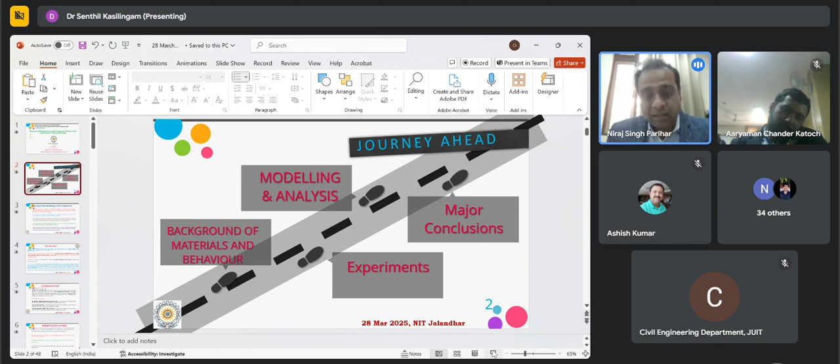And he also has organized some international conferences, national conferences before this, sponsored by TEQIP. He is recipient of the Best Teacher Award at NIT Jalandhar in the year 2018-19. And beside that, he has also got several awards for excellence, including 7 national awards and international awards.

He is also a member of more than 10 civil engineering societies, including fellow member of Indian Concrete Institute and Indian Geotechnical Society. So with this very short description of yours, I come to this platform.

Yeah, I'm sorry to say I'm not a fellow member of Indian Geotechnical Society, but I'm a fellow member of Institution of Engineers, IEI, Indian Institution of Engineers. Yeah, I'm sorry. Okay. No problem, sir. Thank you. Thank you very much for the brief introduction, sir.

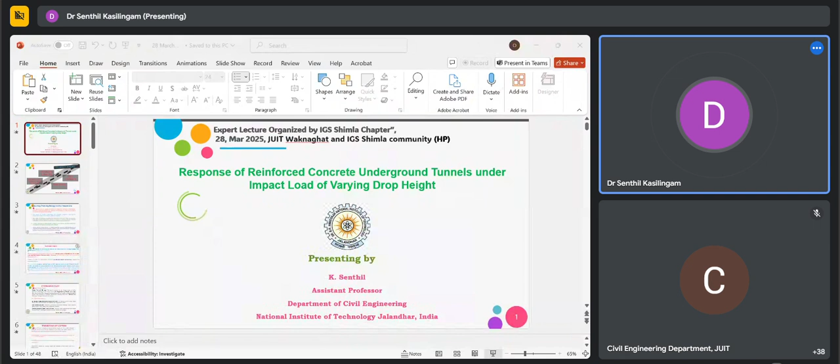So the tunnels, why are they coming? Because of rapid urbanization, city development and horizontal expansion rather than vertical expansion. This is one reason tunnels are coming up. Tunnels play an important role, especially wherever we have blockage. Suppose if you see, especially in Himachal Pradesh or even J&K, these two states.

There are a lot of obstacles topographically, like mountains, rivers, falls, valleys. So this is one of the things. So the tunnel is an important part, and we need tunnels, and the construction of tunnels to provide better connectivity, of course.

Maybe 10-15 years before, even going to Kullu or Lahaul or Manali took several hours. Now, for example, we can reach Kullu from Jalandhar in hardly 5.5 hours. Earlier it took 10 hours plus, and Manali takes another 2 or 3 hours. So we have a lot of advantage because of these tunnels and other facilities.

But at the same time, the problem starts with rock fall, the rolling and falling of rocks, and sudden accidents. Maybe it very rarely takes place, but if it happens, how to protect? What is the damage, and how is this damage to be assessed? That's what is covered in this presentation.

In India, we have almost 4,000 kilometers of tunnels. If I'm right, maybe it's more than 4,000, but approximately 4,000, both railway and road tunnels. A few tunnels have a span of about 9 to 12 kilometers. Those are the longest tunnels in India, especially in HP and Jammu and Kashmir. These two states have the longest tunnels, both railway and highway applications, including Kerala. And in future, longer tunnels are expected to come into the picture.

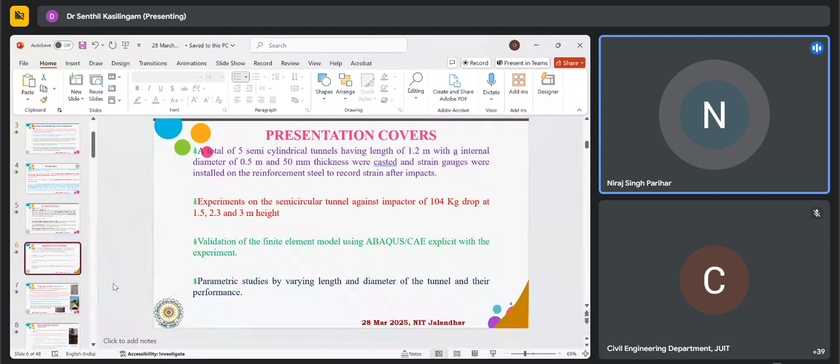Dr. Senthil, sorry to interrupt, but the slides are not changing. Oh, sorry. Which slide? Slide number 6 is not visible. Now it is visible, but it is still not in presentation mode. Oh, okay. Then I will share the entire screen. That will work, the entire screen option. Can you see the screen, sir? Now it's in full screen presentation mode, visible properly. Yes, thank you, sir.

So the tunnels we have considered have a length of 1.2 meter with an internal diameter of 0.5 meter, and the thickness of the lining is 50 millimeter. We have cast RCC tunnels, and of course we have used very sophisticated instrumentation to extract significant information. These experiments were performed by the drop impact test, with an impactor mass of about 100 kilogram, tested under different drop heights of 1.5 meter, 2.3, and 3 meter.

Further, these experiments were validated using finite element software. And we did parametric studies, because such small tunnels are only possible in the laboratory. For an actual tunnel the case may be different; the span and the length are different. So we varied those and studied how the response changes with increasing drop height or increasing span for this 100 kilogram mass.

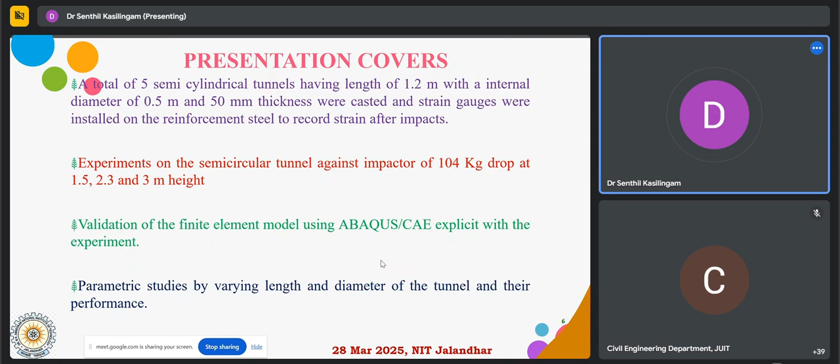Of course, we have not gone into detail varying the mass or the thickness of the lining. That much we have not studied because of the scope of the project, but we were satisfied considering two parameters, the length and the diameter of the tunnel.

For the reinforcement of these tunnels, we used 6 millimeter bars placed at 60 millimeter spacing, with a yield stress of 420 MPa. Strain gauges were used on the reinforcement to measure the strains. This is one of the important parts, because whatever experiments you perform, retrieval of the data is very, very important.

Where you place your strain gauges, what kind of instrumentation you use, how the data is retrieved, which data logger is used, is very, very important. So sophisticated equipment is essential, because we have to retrieve the strain data. We need very sophisticated data loggers, with a frequency of at least 10,000 hertz or sometimes more; the data logger's sampling rate especially should be very high.

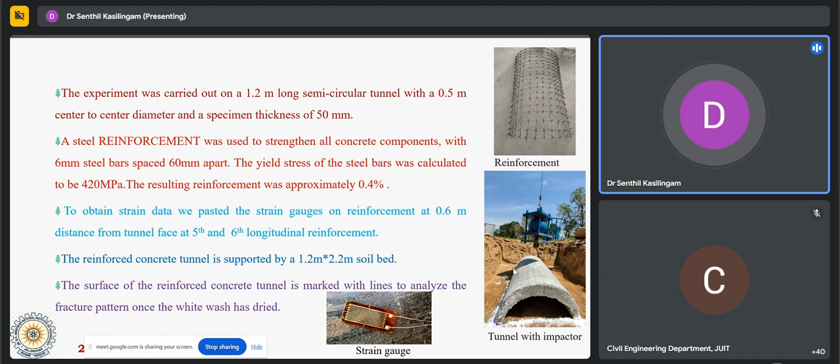So the tunnel was supported with the soil base. That's what you can see in the right side figure. The tunnels were made, and just a simple assembly we have shown in this slide. And also these tunnels were cured. Whatever material we have considered, briefly I have given the materials; we have proposed M25 grade concrete.

M25 grade concrete. Sir, the slide is visible, right? Now it is not a problem. Yes, yes, it is right.

Okay now. So M25 grade concrete we have considered because it's simple to cast, and mainly it should be workable, because we have cast it in the standing position due to the complexity in the shapes. We have to pour the concrete at a height of 1.2 meter, so there is a possibility of segregation and other issues.

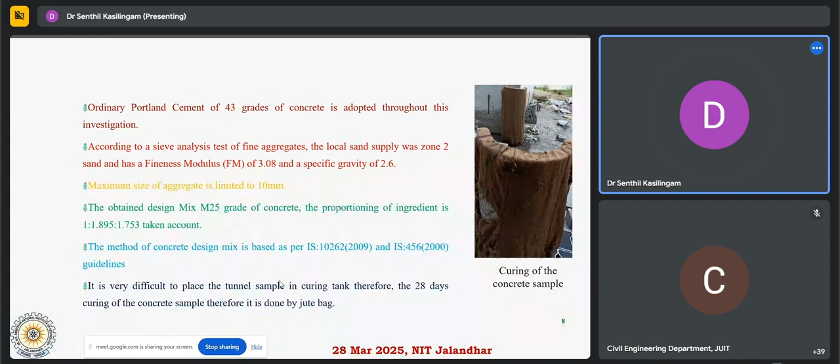So that's why we have taken simple M25 grade concrete, to avoid the complexity in the vibrations or requirement of vibrations, honeycombing, etc. And further, we have cured it as it is, and the mix design and other things we have taken care of as per IS code. And this particular testing frame we have fabricated in front of the Civil Engineering Department, NIT Jalandhar. This is a very simple test setup.

And this particular mass also we have defined by different trial and error. Initially, we made only steel balls, about 1 feet diameter, because it's the effect of a rock falling that we want to develop. So we made the steel balls and tested, but with the varying height and other things, many issues came up.

But due to the sensitivity of the equipment, there is a high chance the load cell and the wire may get damaged during the free fall. So that's why we have not placed the load cell. The impact force was recorded using simple energy principles; nothing else we have used. So the hemispherical nose of 40 millimeter radius we have used, and the height is about 40 millimeter.

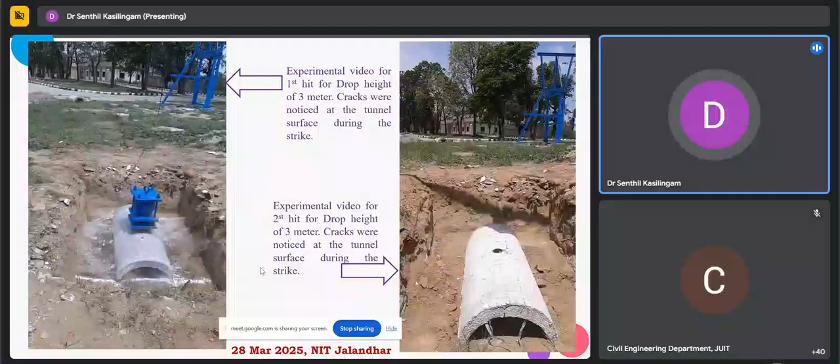And now let's move to some of the videos. Okay. Now this is the simple tunnel, tested without any soil. So you can see after a hit, the impactor is falling. If there were a load cell, there are chances that it may go in any direction, we don't know, so it may get damaged. So that's why the load cell and its connectivity may get damaged, so we have not used a load cell.

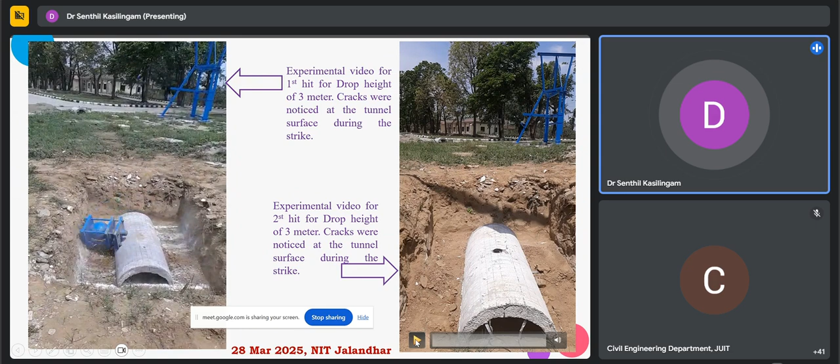And this is the first hit, just at the beginning of the test. And then we went to the second hit, that is multiple hits. The second hit also we tried with a 3 meter drop. So how does it take place? If we drop the steel ball alone, there is a chance that only local impact will develop. But when we use the steel plates, they try to cause a global impact.

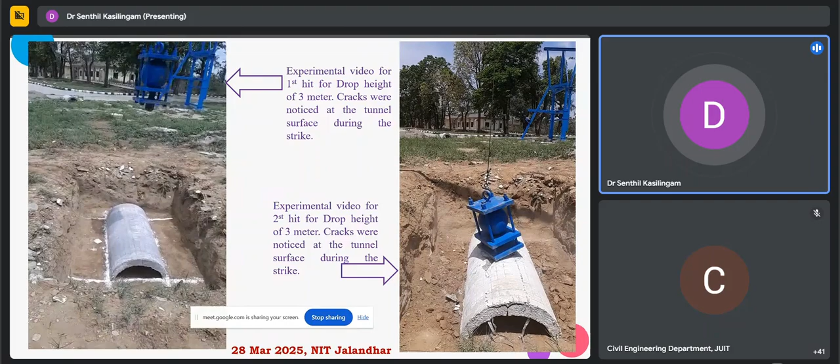Because when rolling of rocks takes place, rocks hit the structure repeatedly, and they may not be the same shapes or similar in nature. It may be some big rocks or maybe some small stones; there is a possibility of a mixed mode. So that's why we have used this type of arrangement, which we arranged and changed by trials. Now let's go to the tunnels with soil.

We have considered only around 150 millimeter filling, because the nose height is only 40 to 50 millimeter, near about 100 millimeter, not more than that. So if we fill more, the soil itself takes the entire load, and it will not reach the tunnel. That's why we have used a very nominal soil filling of about 150 millimeter. Then we have tested, and if you see here, this is the first hit.

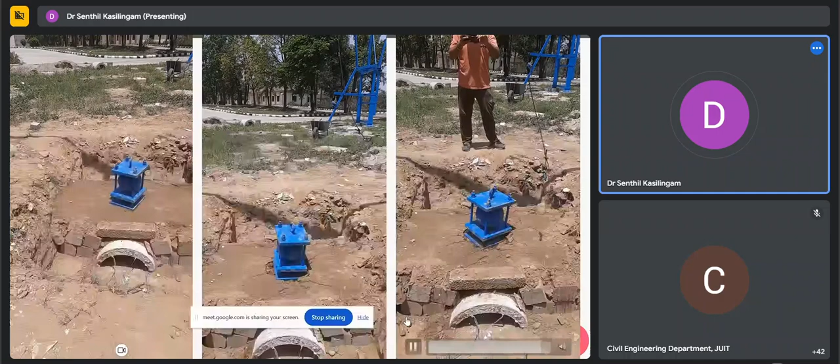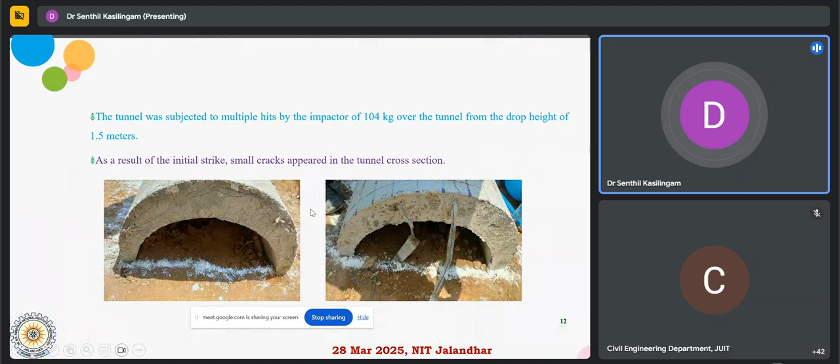And this is the multiple hit. It's like a second hit, a third hit. So you can see how this concrete tunnel deforms, and the response at the base, how it takes. So all this we can see. Okay, and further the responses were recorded in the form of the residual displacement and residual spalling. So all this we have recorded.

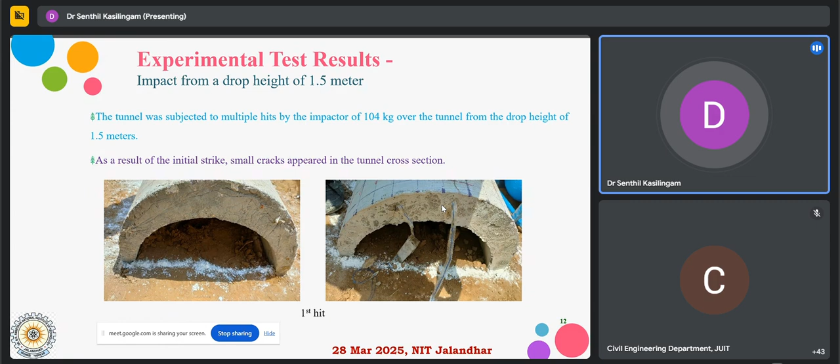And this is the first hit. We can see this is before impact and after impact, and you can see there are very small cracks. But when you go to the second hit, you can see significantly wide cracks at the crown. Okay, and also there is compression damage. You can see at the top surface there is compression damage, and of course the tensile damage at the

bottom of the tunnels. And the strains we have recorded. I think 2 to 4 strain gauges we have used, but a couple of strain gauges were not giving any readings. So whenever we go for testing, try to always go for more strain gauges or accelerometers, whatever we are placing, so that you will get a good number of results and we can use it for the validation. And now let's go to the third hit and fourth hit.

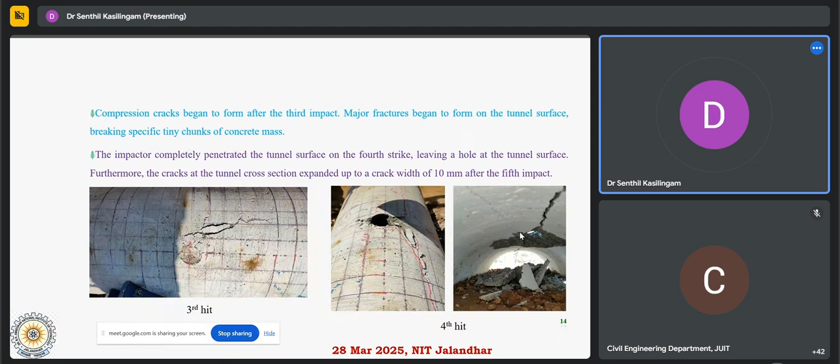The third hit, you can see there is significant damage at the top. That is compression damage. And at the fourth hit, you can see very clearly, this is inside the tunnel. You can see there's significant spalling of the concrete. And also there is a longitudinal crack in the tunnel. Okay. And further, this is the test at 1.5 meter height. Okay. Now let's increase the height.

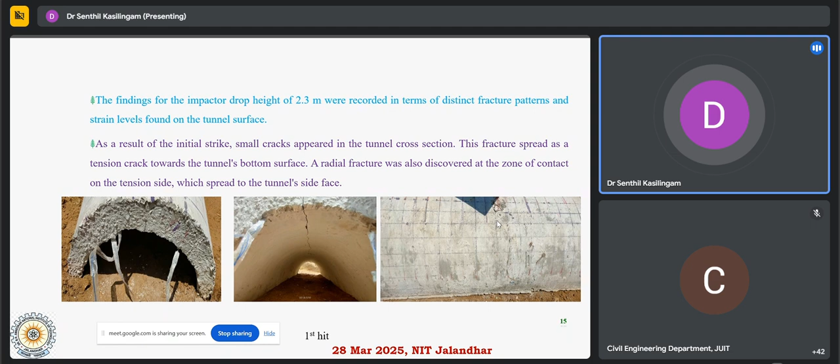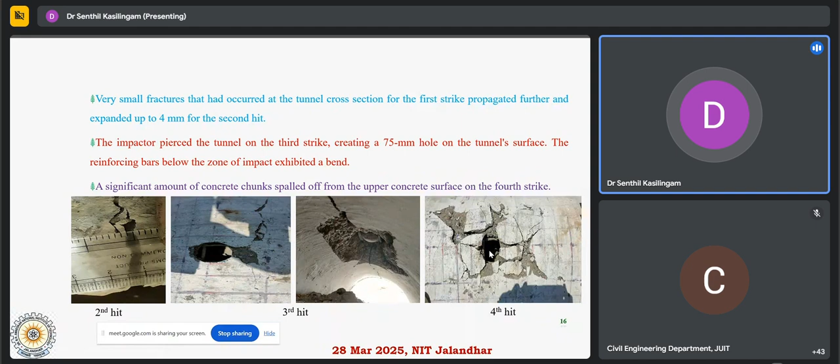Suppose 2.3 meter height. So what is happening at the first hit itself? You can see the longitudinal crack. It's a very precise crack that developed, and of course very insignificant compression damage. So there is only tension damage. And then the second, third, fourth hit, you can see significant damage, and especially at the fourth hit at 2.3 meter, there is significant loss, or you can say spalling and damage at the top surface of the concrete.

And further, this is the result at a 3 meter drop height. So at 3 meter, what is happening? In the first hit itself, there is a significant crack. Even diagonally there is a crack. Also longitudinally there is a crack. You can see inside the top right corner picture, that is inside the tunnel. The cracks were longitudinal, and also there are diagonal cracks.

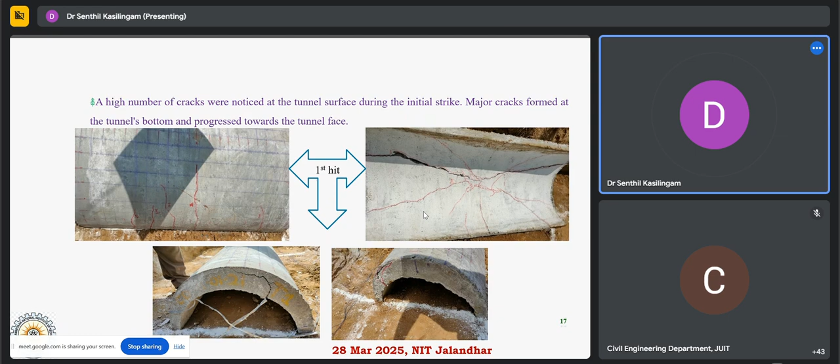And now, if you go to the second and the third hit, just see this picture, what is happening in the first hit and the second hit. In the first hit there are only cracks. In the second hit there is significant damage or spalling. The volume of the concrete is significantly gone, or it just exploded.

And further we went to numerical simulation. So this is the behavior we want to capture. The impact force, the strain, and the residual displacement we have. These three data were used for the validation. And the geometry of the concrete tunnel as well as the soil and the reinforcement were modeled and considered as a deformable body, whereas the impactor was modeled as a rigid body.

The concrete we have considered as M25, as already told you. Steel reinforcement of about 420 MPa strength was considered. And dynamic explicit analysis we have considered, and the time step is 0.05 seconds. And the frequency, the time step delta t, is 1/100.

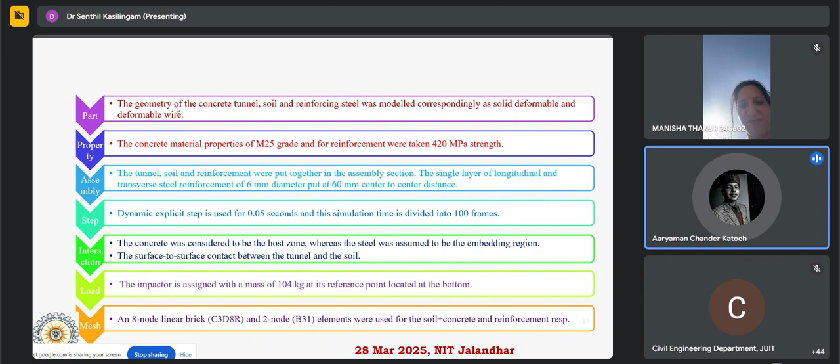Sir, if we change the section from circular to oval, then what would be the difference? Sorry. So the tunnel sections, are they circular or oval? Actually, there is disturbance. Can you please repeat? Sir, the tunnel sections which we are testing are oval sections or circular sections? Amandeep sir, or somebody else, can you help me? He's asking whether the tunnels being tested are oval sections or circular sections. No, it is circular. It is circular, sir.

Aaryaman, we can take the queries towards the end of the lecture in the discussion session. I think we can first finish the lecture. It's not a problem, sir. Anyone can interrupt. It is not a problem, Atash. Okay, sir. Okay.

So the time step we have considered is 0.05 seconds, and the frequency, or you can say the delta t, is 1/100 seconds.

Sir, can you hear me? Yes, now you're audible. My presentation is visible? No, sir. Yes, it's come now. Sir, can you hear me? Yes, now it's visible, sir. Yes, I can hear you, sir. Your presentation is also visible. Okay. Can you hear me, sir? Yes, sir, we can hear you. Done, thank you, sir.

So the concrete was considered as a host zone, whereas the steel was, you know... right, sir.

Sir, I think the voice is reaching late. Yes, I think there is some lag. I think you can continue without interruption, that will be okay to us.

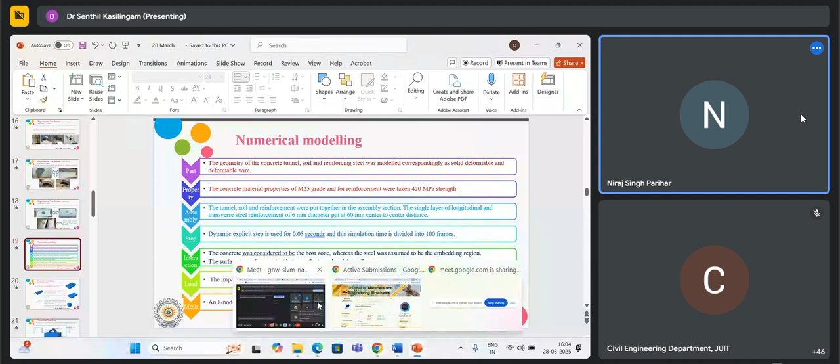Sir, now can you hear me? It's very proper, yes, sir. Yes, sir. Done, thank you.

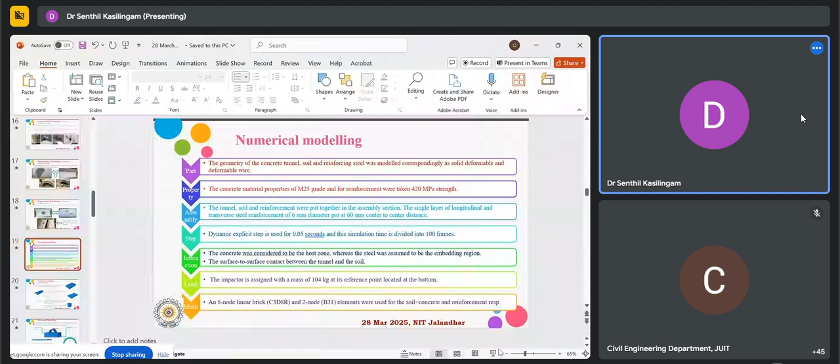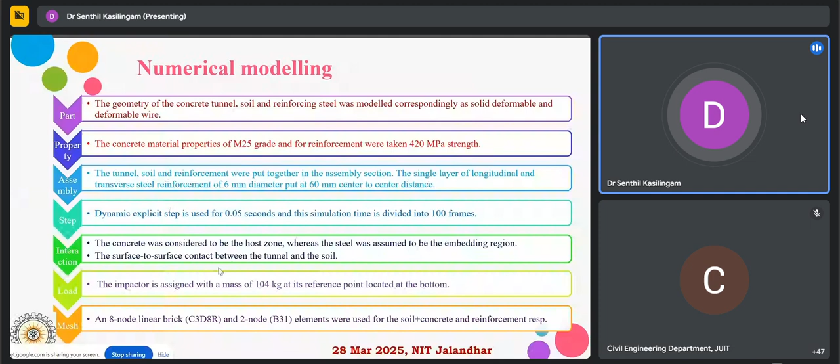And also the surface to surface contact between the tunnel and 8 node linear brick elements for the concrete were considered, with a lot of trial and errors. Also some assumptions we have made in the computational depth that we have done, like the dimension of the soil samples were taken as 1.83 meter by 1.2 meter, and the thickness was considered 0.3 meter.

But actually to understand the depth of the soil, at what depth this soil pressure goes, for that you have to use some theoretical equations. There are equations, and based on those equations you have to derive this pressure distribution, so accordingly you have to choose the soil dimensions. This is one thing. But here, maybe we have not followed that because of some of the constraints, so that is one thing I want to highlight here.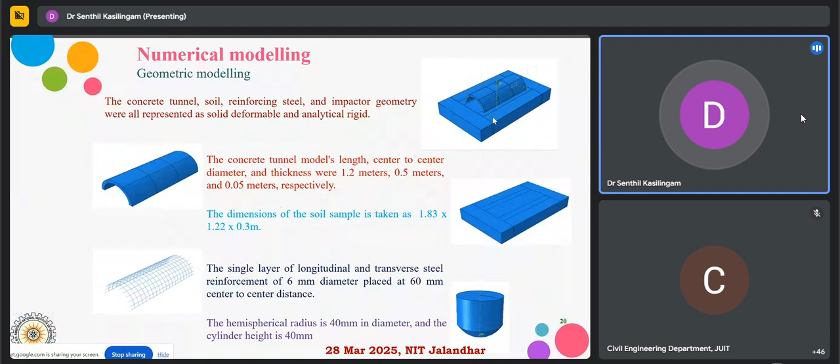Sir, can you hear me? Yes, sir, we can hear you. Oh, this particular slide, you have not listened to? No, sir, not this one. This slide? No, sir, okay, this slide, yes, you were discussing this one. Okay, I think I don't know the network, it dropped out. Sorry, okay.

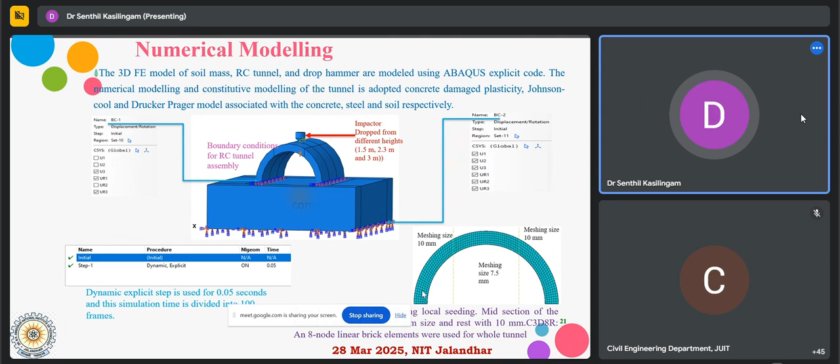So the choice of the constitutive model is very important. Suppose, for example, the soil, we have different models. Even if you go to the Abaqus library or ANSYS library, you have different models, so which model do you have to choose? For example, we have studied the response of clay brick walls. The bricks we have modeled using the Drucker-Prager model, also we have modeled bricks using the Mohr-Coulomb model. In the same study, to some extent the Mohr-Coulomb model was giving better results than the Drucker-Prager model, but in this case, tunnel problems, we felt the Drucker-Prager model is giving better results.

So that's why the choice is very important, whether you have to choose a phenomenological model or a physical based model. As a civil engineer, we can limit with either one, it's not a problem. And now a few constitutive models, just for your information: for a phenomenological model, we can say Johnson-Cook model or KHL model or Arrhenius type model, and also for physical based models, the Zerilli-Armstrong model is one of the very renowned models.

If you go very specific for metals, soil, concrete, ceramic, we have very specific models, because it depends sometimes on whether the material is ductile or brittle, or something else. So that's all we have to decide, and we can choose it accordingly.

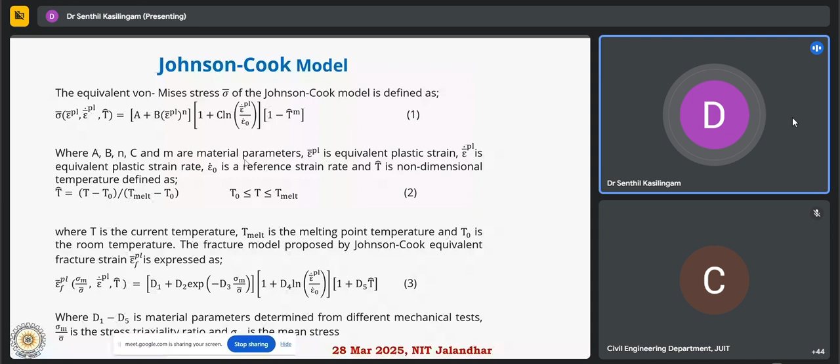For Johnson-Cook model, especially for steel reinforcement, for metals and ductile material, we can use it. These parameters, during my PhD, I have characterized and used. If you Google it, you'll get an idea, it's more widely used and generally available on Google, you can go through these models. For four different metals, I have characterized during my PhD, so I don't want to waste time presenting here. If you have any queries in this regard, please contact me, not a problem.

This is the parameters we have used for the steel reinforcement, considering strain rate, stress state, and temperature effect under strength as well as failure state. Mainly the strength is nothing but the model, it carries the load. When it reaches the maximum or ultimate load, your strength model stops. There is no effect, then it is called failure model. After reaching the ultimate point, whatever behavior we consider as failure, because your strength, displacement, resistance, or forces start decreasing, that is called the failure model. So A, B, C, N, M are strength constants, and D1, D2, D3, D4, D5 are failure constants.

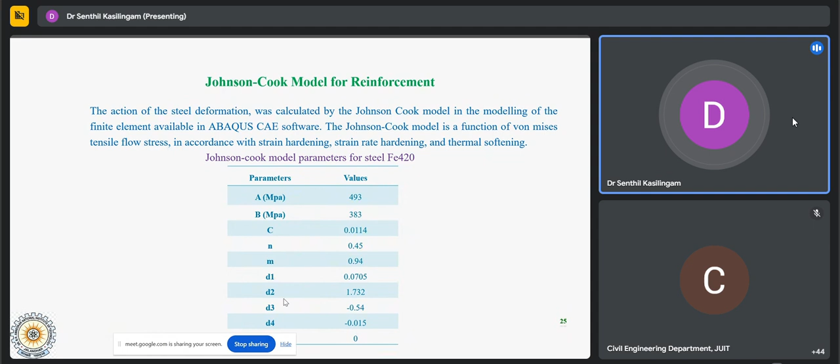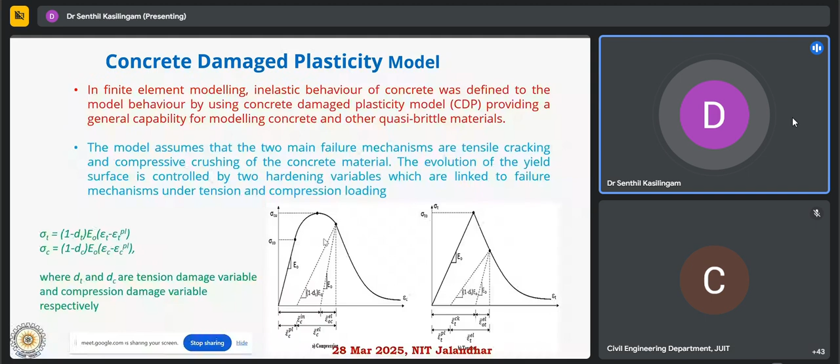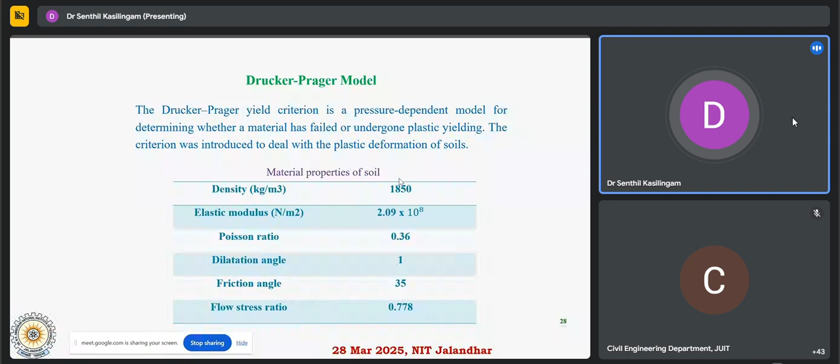For concrete, this concrete damaged plasticity is one of the renowned models you can use. It's simply compressive behavior and tensile behavior. For soil, we can use Drucker-Prager. As I already told you, you can use even simpler models, there are standard material constants. Either you can calibrate those constants through characterization, or take them from the literature. It's best if you characterize those material parameters, it's always good because that will try to give you realistic results.

The mesh convergence, as I already told you, we carried out mesh sensitivity analysis by varying the mesh size: 20, 15, 12, 10, and 7.5 mm. What displacement we got from the experiment is about 32 millimeters, which is called the residual displacement. Also the corresponding impact force, about 95 kilonewtons, that we achieved when the element size in the concrete is about 10 to 7.5 millimeter mesh size, so that mesh size we considered for further analysis.

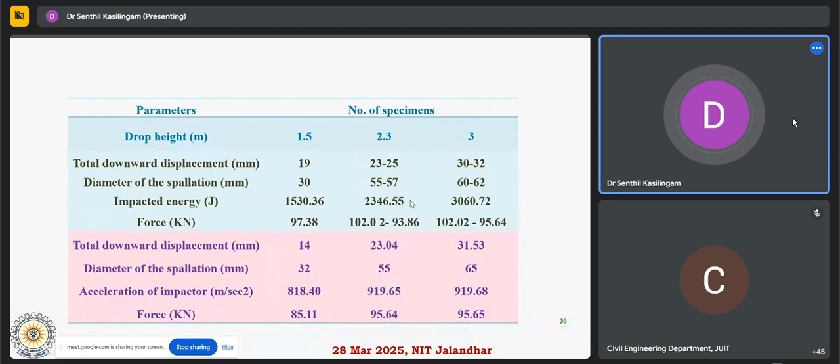We also recorded the strains. Experimentally we got micro strains of about 150 to 175. The numerical strain also reached about 185 to 190 micro strains, with a maximum deviation of about 10%. However, in the experiments it immediately comes down, maybe due to the strain gauge response. That's why sometimes, especially recently, I came to know issues using some equipment I purchased from Applied Measurements.

But HBK suggests different equipment. You have to use very sensitive machines especially for strain measurement. So I can recommend, because my equipment is not capturing the strains properly, that I purchased from Applied Measurements UK. But if you are buying HBK, since HBK is also one of the renowned manufacturers of data loggers and devices, that may be better, from conversations I've had, because I wasn't happy with the strains I got. But anyway, this is just for your information.

These are the different failure patterns under 1.5 meter, 2.3 meter, and 3-meter drop heights, which we have compared, along with the residual displacement. Now, the compression damage, damage C, describes compression damage, damage T describes tension damage, C and T being compression and tension. So what is happening on the front side, for 1.5 meter, 2.3 meter, and 3 meter.

So front side and rear side, we can see from this image. And similarly, maybe if you recollect the experimental results, we can get an idea how the cracks develop. Also some of the videos I can show you.

During impact, we don't actually know what is happening. If you watch the slow motion videos we have recorded, we can try to get some inputs. But if you carry out the finite element analysis, definitely you will get more insights. That's one of the main advantages of doing such a comprehensive numerical analysis.

And this is the displacement. How the displacement happens, it's almost 46 millimeter displacement. That's what is happening.

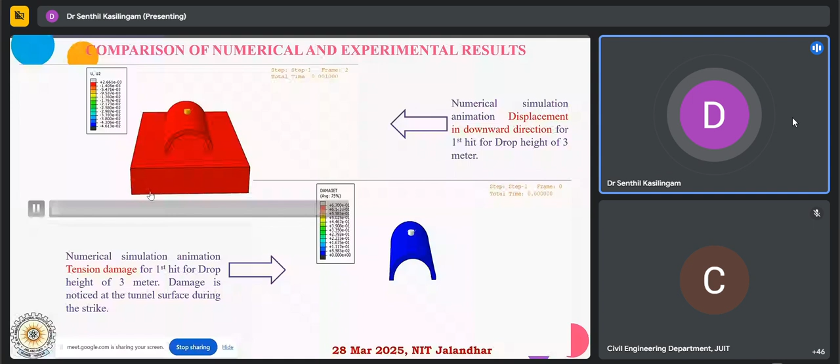And here, if you see the damage, how it takes place, how the damage is propagating. Can you see the video, sir? No, sir, not still. This tension damage video is not visible. It is too much lagging. Even the displacement video is not visible. I was playing the displacement video. That means my screen and my voice, there is a lag. Sir, earlier that was visible, not as of now.

Okay, now I'm repeating again this tension damage video. Can you see this now? Yes. Okay.

So you can see there is a significant crack that develops when the 3-meter drop height takes place. We can see very precisely those cracks, and also a little bit of spalling at the edges. This is just for your idea, so that you can further use the techniques and get more insights.

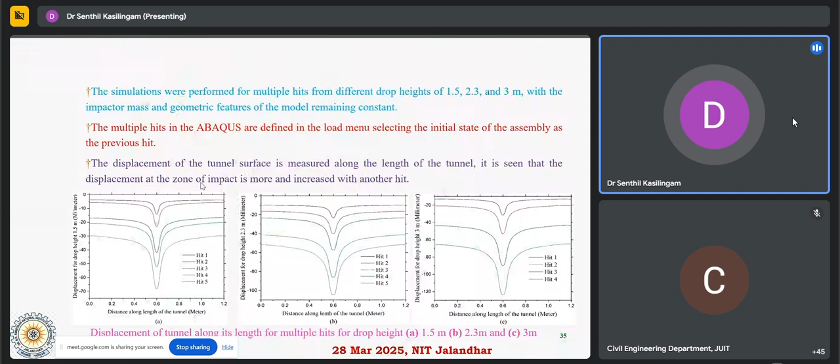What is happening in the displacement, I can tell you. When you have 1.5-meter drop height, on hit 1, hit 2, hit 3, hit 4, hit 5, up to the fifth hit we have seen the displacement increasing, and at fifth hit we have reached 70 millimeter. But when the drop height goes to 2.3-meter, we are going up to around 100 millimeter displacement. When the drop height increases to 3-meter, it went up to the fourth hit, and the simulation shows about 120 millimeter displacement, quite high.

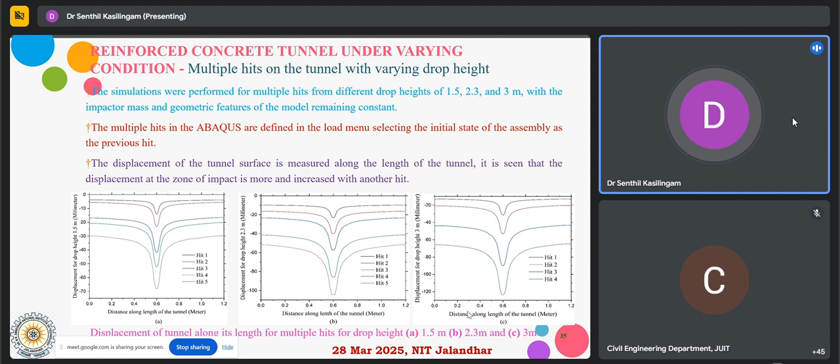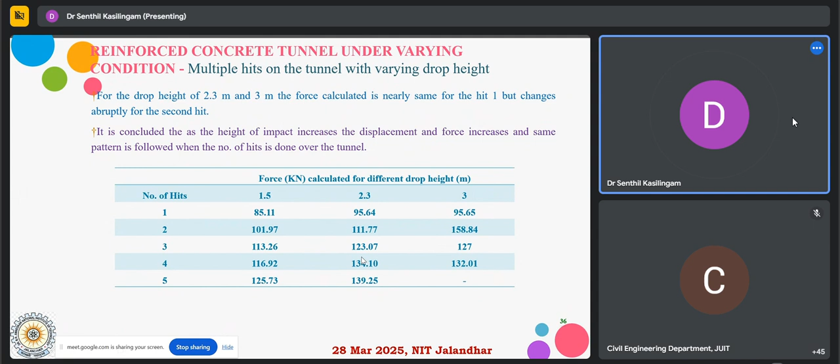So 132 kilonewton is the maximum. That's what we have achieved from the numerical simulation.

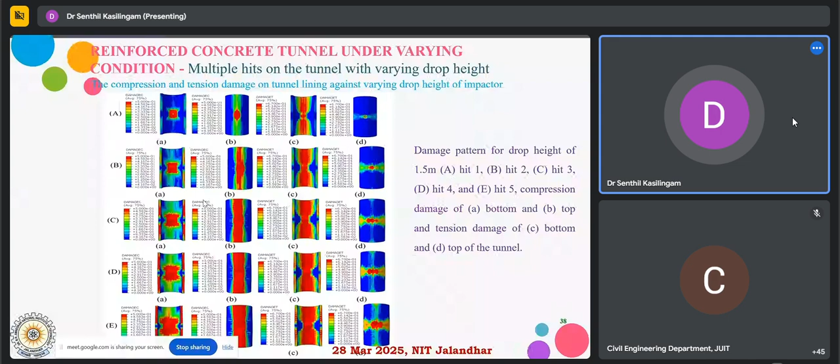Further, the tension damages that we have compared on different cases, for hit 1, hit 2, hit 3, and hit 4, and all different cases. Further, I'd like to go to the different parametric studies, because the multi-hit impact, that is fine, I don't want to discuss further.

So that means there is a local effect, a local failure due to this impact, there is no global failure. So maybe due to this rockfall impact, even with multiple hits happening, it may not affect your tunnel. That's what the simulation is stating. These results you can further validate by performing more simulations and doing some case studies. Okay, this is some insights for you people.

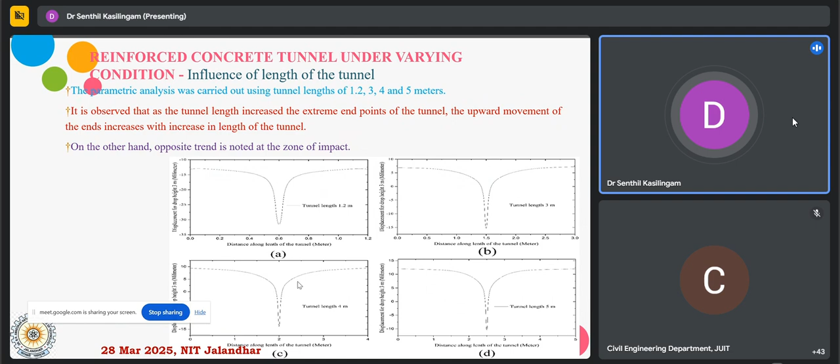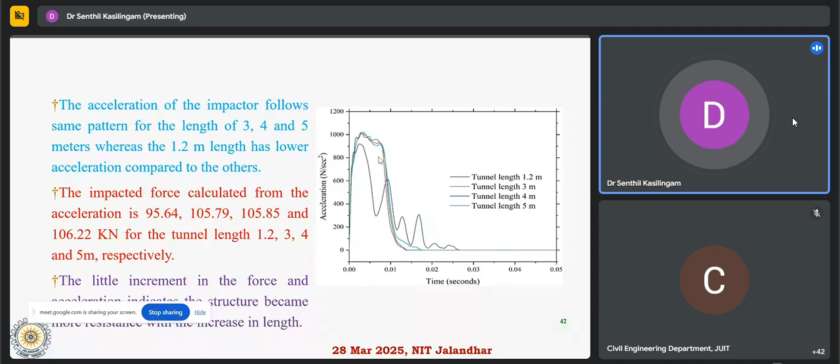And the acceleration which I have recorded, yes, it is a constant. After 1.2 meter, the acceleration is a constant. It is not changing, irrespective of the length of the tunnel, either 3 meter or 5 meter. The acceleration is about 100 g. Okay. Now let's talk about the damages.

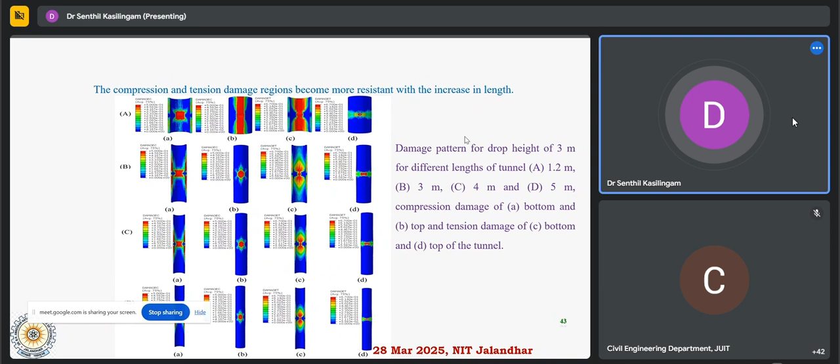By varying the length, you can see that the damage is only local damage. Even if you increase the length, it won't affect, because at maximum 1.2 meter length, or maybe the shorter span length tunnels, it may be sensitive. That's what I want to say based on the findings from this simulation.

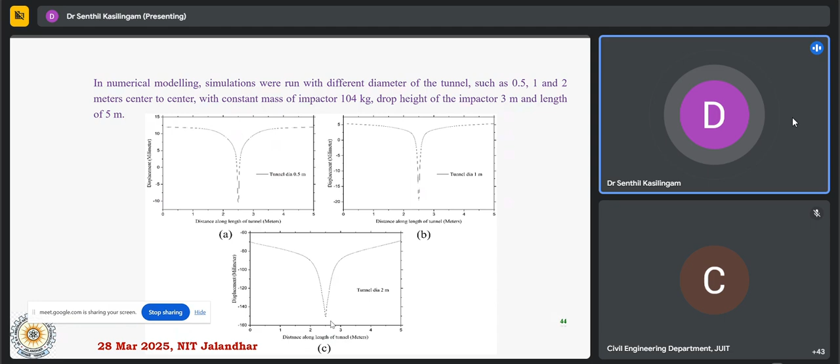Next, we have varied the diameter of the tunnels. So by varying the diameter, there is an increase in displacement that we have noticed. So 0.5 to 2 meter when we are varying, 0.5 is our actual experiment, 2 meter is a numerical simulation. So displacement is increasing significantly, near about 140 millimeter.

Of course, here your acceleration actually changes, and the damage also, when the diameter increases, of course, there is a damage change. Otherwise, it's local damage, but a little bit of compression damage is there. Otherwise, it's a local damage.

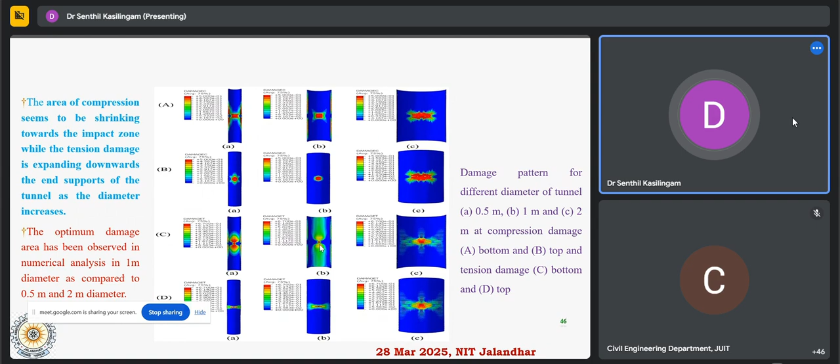So let's conclude this presentation. In case of length variation, the impact force remains near to constant. You vary the length, it won't affect your response. And the optimum damage area observed in the simulation is at 1 meter diameter.

Sir, can you hear me? Yes, sir. Now we can hear you. There was some disturbance in between, sir, in the conclusion slide. Acha, there were disturbances. Can you hear me now? Yes, yes. Your voice got disconnected for a while. Okay. Actually, maybe some phone calls. I'm using the internet from the mobile, because the institute internet disconnected due to a power shutdown. Okay, okay.

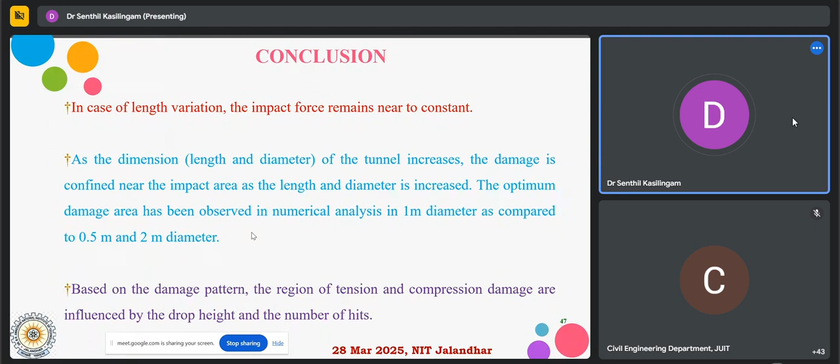As the dimensions, especially length and diameter of the tunnel, increase, the damage is confined near the impact area. Of course, the damage is not affected or increased by either increasing the length of the tunnel or increasing the diameter of the tunnel. That's the conclusion. So the local effect is significant. Local failure is significant. So with this, I would like to conclude my presentation, and it's open for question and answer.

First of all, I'd like to extend my thanks to you for coming to this platform. Yes, sir. Sir, thank you very much for this wonderful presentation. Thank you very much, sir. Some queries are from my side first. I would like to ask you some questions which are coming into my mind. Maybe I missed the initial few slides because I was in some meeting.

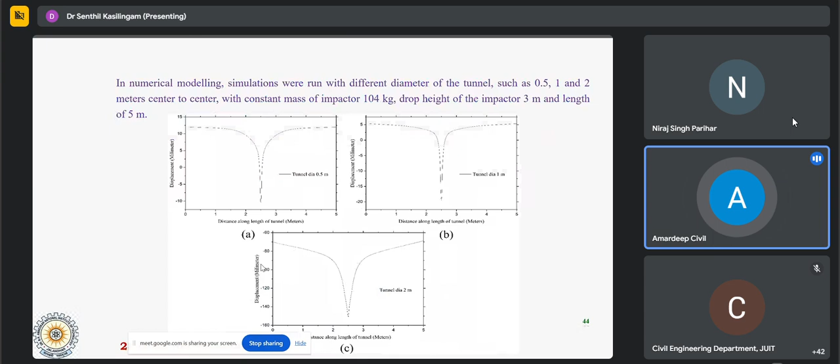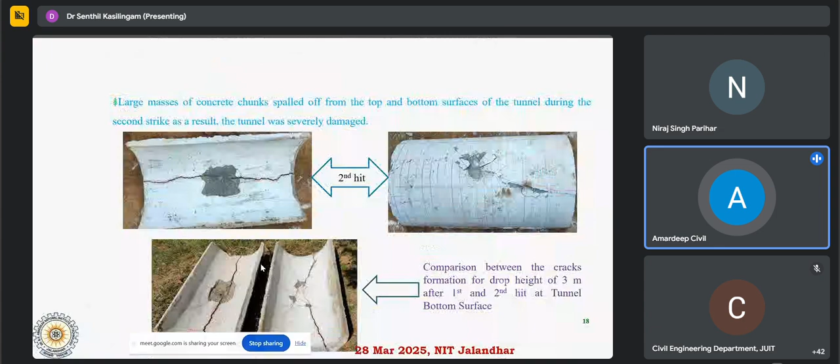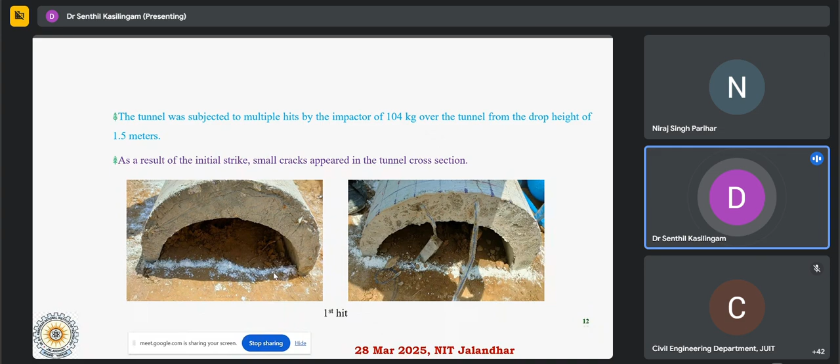So I want to ask you, sir, was this study conducted on the tunnel fully loaded, meaning loaded with the soil mass or with some surcharge over there? No, yes, those experiments we have performed, but the buried tunnel, what we have shown, maybe the second video, this simulation I have not presented over here. I have presented only the simulation of these results. The buried tunnel results I have not presented.

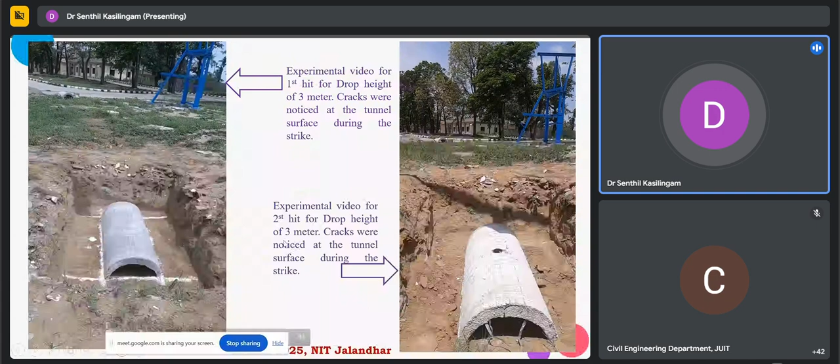Okay, fine. So this tunnel was buried into the soil mass, and the tests were conducted on those only? Yeah, exactly, sir. Not with water flowing through this kind of tunnel, because circular tunnels we mostly utilize for water bodies, na? Yes, sir. That may be a more realistic case, I can understand.

But at an experimental level, maybe we have to go for some bigger level. Because when you drop with water or saturated soil, this is as good as saturated soil, fully compacted. Right, sir. We tried a good compaction. However, with the water, if we are dropping it, I don't know whether that causes any impact at an experimental level, but maybe that will be a future scope.

Right, sir. Sir, can you hear me? Yes, I can hear you, sir. Your voice is very clear to me.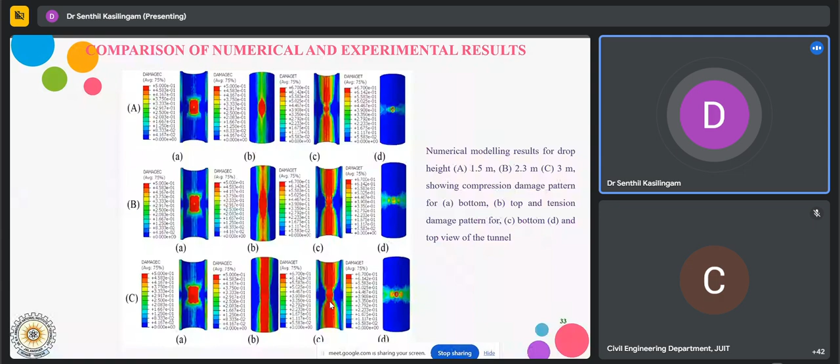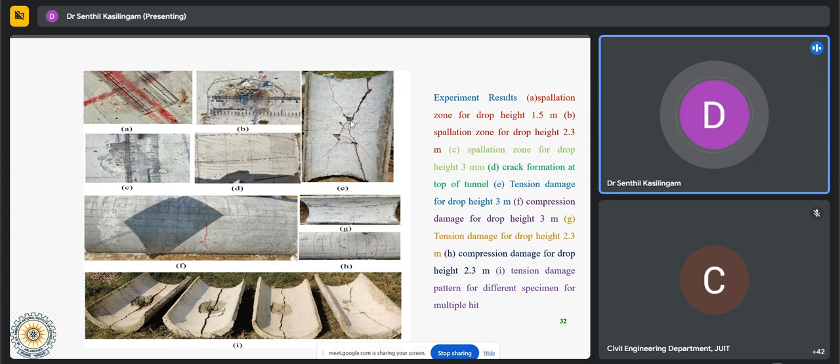Suppose you see, sir, the last row, third figure. I can show you. Can you see in this figure, the bottom right corner, or you can say the top right corner? Okay, so this is actually the tension damage inside the tunnel. That's what this color indicates. Right, sir. Thank you.

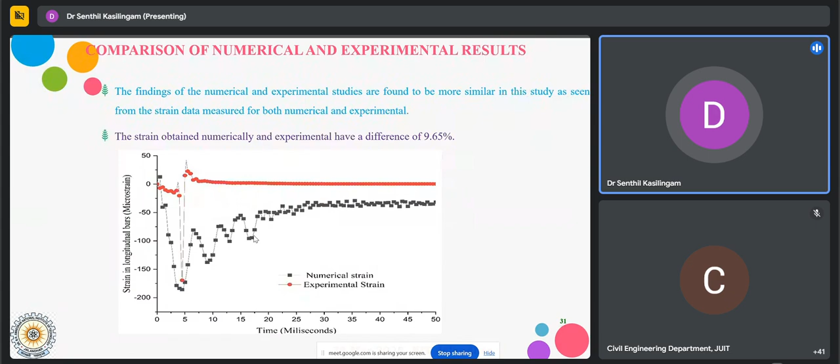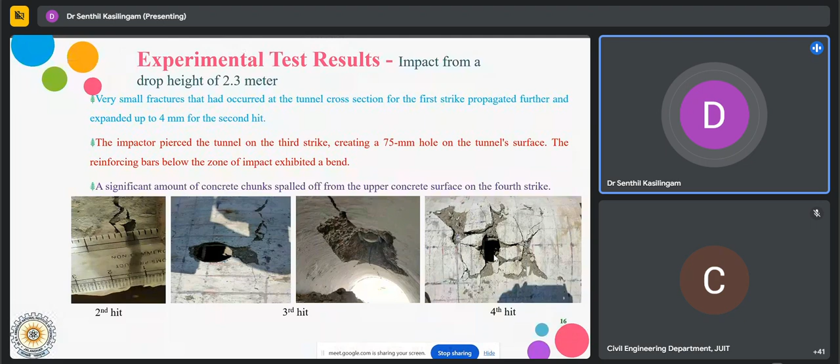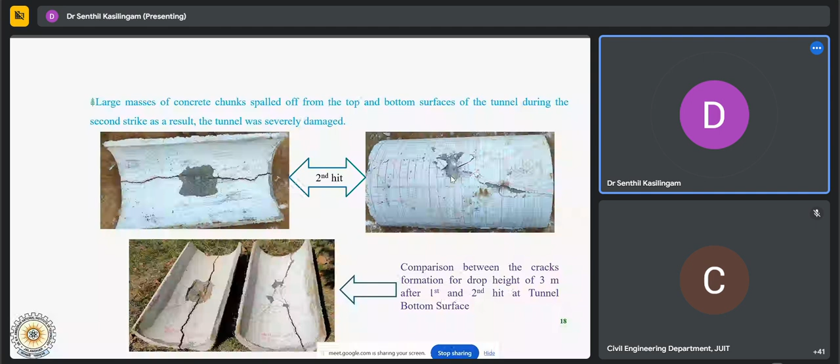And the last column, figure D, is the top surface of the tunnel. You can see in this figure a significant crater, which is nothing but the damage, significant at the top surface, as from this experiment. You can see this is the hole at the top. In the second, right side figure, at the top surface there is a crater equivalent to the diameter of the impactor.

Can you see here, the bottom right corner, the combination of yellow, green and red color? Yes, I can see that, sir. My cursor is visible? Yes, you are revolving around this yellow and red color. Exactly. That red color is equivalent to the diameter of the impactor. Great, sir. Thank you, sir, for this informative session.

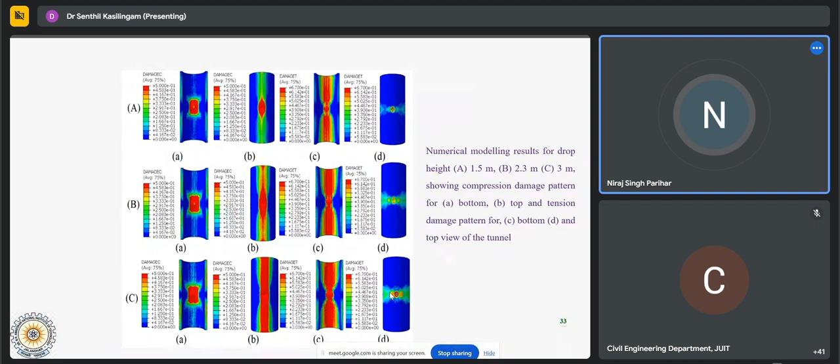I'd like to ask our participants. Dr. Senthil, there is a small query from my side also. In case we change the soil that is acting as an overburden, what will be the effect on the impact behavior? Sir, you mean a buried tunnel? Yes.

There will be a very slight impact, because that is the conservative side. First the soil will fail, then the tunnel. So you have to define two different steps: first, the interaction between the impactor and the soil; second, the interaction between the tunnel lining and the impactor. Both steps you have to define in your Abaqus. Of course, some energy will be absorbed by the soil during the interaction with the impactor, so some energy will dissipate.

That energy may be very small, because if you see the volume of the soil just below the impactor, it's hardly an 80 millimeter diameter impactor. So even if you see the whole 150 millimeter height of the soil with a diameter of 80 millimeter, the volume is very small. So how much energy will that soil absorb? Only that much loss will be there in the impactor, and the remaining will go to the tunnel lining. Are you getting, sir?

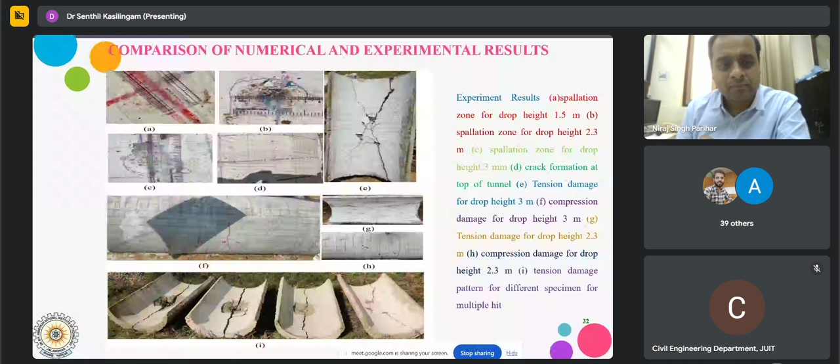We have made an arrangement with a 1 feet by 1 feet plate. So when the nose went inside, when the tunnel was perforated by the nose, then your base plate is trying to hit. That is why your force keeps increasing in multi-hit, because of this reason. Okay, so you indirectly assess that failure point. Exactly, sir. Thank you very much.

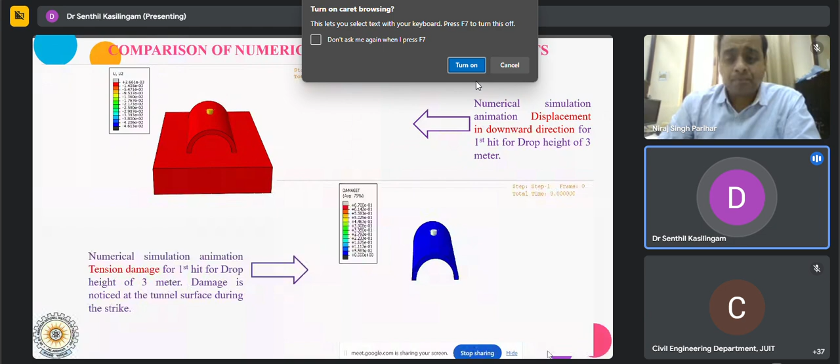Excuse me, so what would be the variation in the graph if we change the cross-sectional area to rectangular or square tunnel sections? Of course. You see, this is semicircular in shape. Suppose if we go for a rectangle, the phenomena will change. It's like a box culvert. Am I right, sir?

It's like an inverted open trench, or you can say it's like a box culvert. So your behavior will change because there is a corner, a sudden change in the geometry, so high shear stress will come into the joints. Here, in cylindrical tunnels, it is a smooth surface, so such complexity will not arise, but there the shear failure is very important. In such cases, you have to adopt a shear failure criterion in the numerical simulation.

So what if we change to oval shapes? Yes, you can adopt. Actually, we have different types of tunnels, oval shape also, and the rectangular shape also, elephant leg or something. There are 4 or 5 tunnel shapes, openly available on Google. Which type is the best structure for mountain terrain or subsoil? Of course, the oval or another shape, I'm not able to recollect.

But the problem in my case is that the fabrication of the reinforcement in the laboratory is very important. If you go for an oval shape, I have to bend my steel reinforcement by pressure, by pre-stress, so the nature of the tunnel will change. You have to bend the entire reinforcement for making oval, parabola or cubic parabola shapes. That will change the Johnson-Cook model; those parameters may not be valid, and I have to characterize pre-stressed reinforcement for numerical simulation.